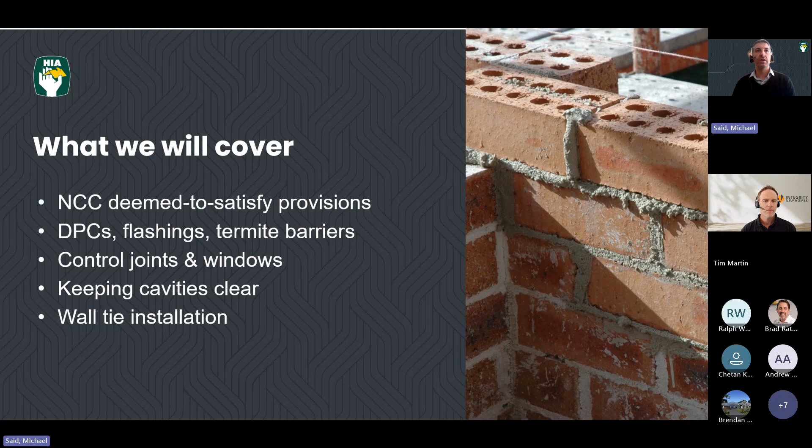I'm just going to briefly cover off the NCC deemed-to-satisfy provisions. I'll look at DPCs, flashings, termite barriers, control joints and windows, the need to keep cavities clear, as well as wall tie installation.

Starting with the NCC compliance structure and how it works: for houses there are 3 different deemed-to-satisfy options, set out in provision H1D5 of NCC 2022 Volume 2. So if you're doing brickwork or masonry, you have 3 different separate compliance pathways, all equivalent in terms of compliance, all deemed to satisfy. There's also the option of a performance solution, but in terms of deemed-to-satisfy, these are 3 separate and different compliance pathways - you can't mix and match between them unless you do a performance solution. So if you choose one, you need to stick and comply with that one in its entirety.

The first option is the use of Australian Standard 3700. The 2018 edition is referenced in the 2022 NCC, and it's also referenced in Volume 1 for multi-residential and commercial buildings - it's the only reference in Volume 1. The second option is the AS4773 series, basically masonry for small buildings. There are 2 parts: Part 1 is a design standard, Part 2 is a construction standard. This is only referenced in Volume 2, more for housing, designed more like a recipe-style standard as opposed to an engineering standard like AS3700, and it's probably more common for housing construction.

The final option is complying with Part 5 of the ABCB Housing Provisions Standard. Again, it's an equivalent option, but it does have some limitations: it's only up to a certain wind speed, only on a Class A and M site, not in alpine areas, not on buildings requiring earthquake design, and does not cover reinforced masonry.

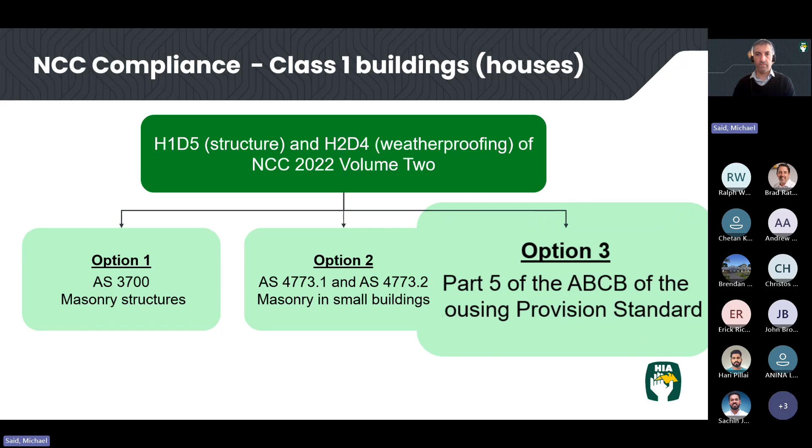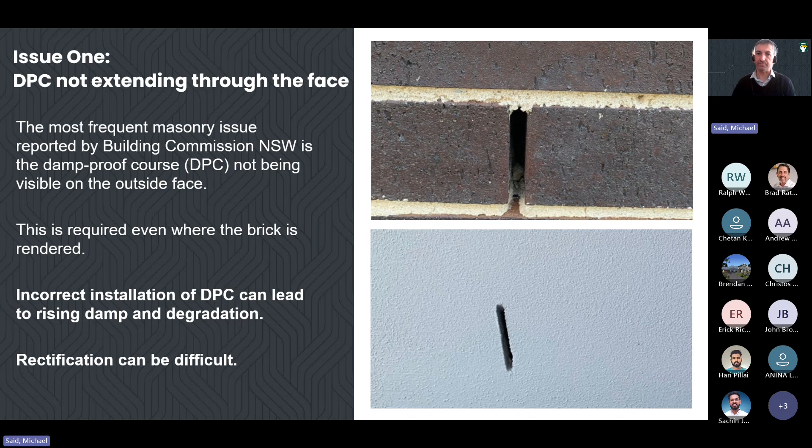Other things to consider is the proper material selection for your DPC. Materials complying with AS 2904, so polyethylene sheets and bitumen, or PE coated aluminium sheets, are typical DPC materials. The standard also includes other options like bitumen impregnated fabrics.

Also you need to consider your laps at your corners and at your junctions of 150 millimeters, and obviously the full width at the corners, and also making sure that your DPC has enough clearance to the ground level. Depending on what type of ground level you have, you're looking at between 50 millimeters and 150 millimeters of clearance. If you've got a paved area that's covered, you can reduce that clearance between the DPC and the finished surface level to around 50 millimeters, 75 if it's uncovered, or 150 for pretty much everything else.

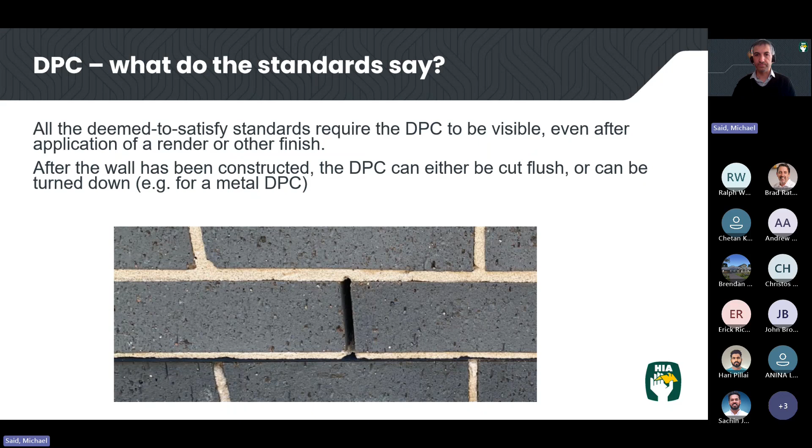So when we look at DPCs and flashings, there's obviously a DPC, but there's also a flashing, and the flashing isn't always acting as the DPC, but where it is, it needs to be visible from the face. Where the flashing is separate to the DPC, it depends on which standard is being used and where the flashing is located. For example, a window flashing or a head flashing is not necessarily acting as a DPC, so the requirement there is not necessary for it to come all the way to the outside.

If we're looking at the housing provision standard, if it's acting as a cavity flashing, or at the base of the wall or something like that, then it needs to come out through to the face. If it's a roof abutment, again it needs to come all the way through the face. But if it's a sill or head flashing, it only needs to come in around 30 millimeters into the face, so it doesn't need to come all the way through the wall. For AS 4773, cavity, sill and head flashings similarly don't need to come all the way through the wall, but if you've got a roof abutment flashing, then it does. And for 3700, if you're using that standard, then you're looking at following the engineer's design, because AS 3700 is an engineering design standard.

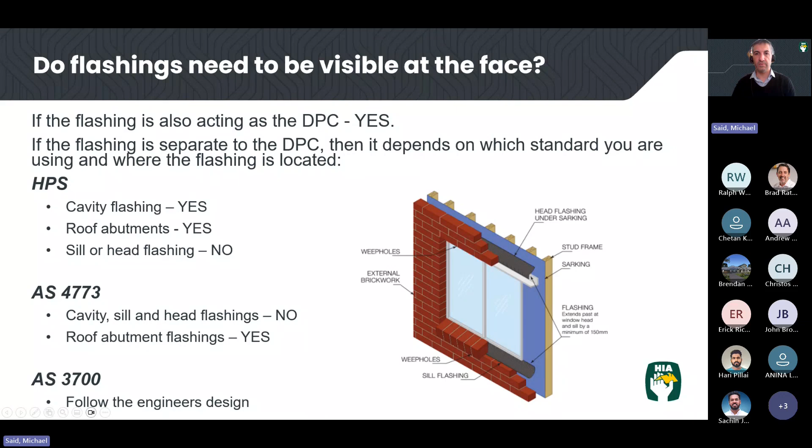So what about your termite barrier? If you've got a termite barrier that's part of your DPC as well, or just above your DPC, you can have the DPC integrated termite barrier. I think there are a few on the market.

If you've got a termite barrier as a perimeter cavity, like a blanket or a chemical sheet as the perimeter barrier, it too also needs to come through and be visible from the outside. It's something to be mindful of. You can't have it sit 10 mil in because it's not going to provide you that continuous treatment. There is also a requirement of AS 3660 Part 1, which requires the edge of any sheet-based termite barrier to be exposed even through the render. So if you're using a sheet or a chemical impregnated sheet as your termite barrier, it needs to come through and be visible on the face of the wall, similar to your DPC.

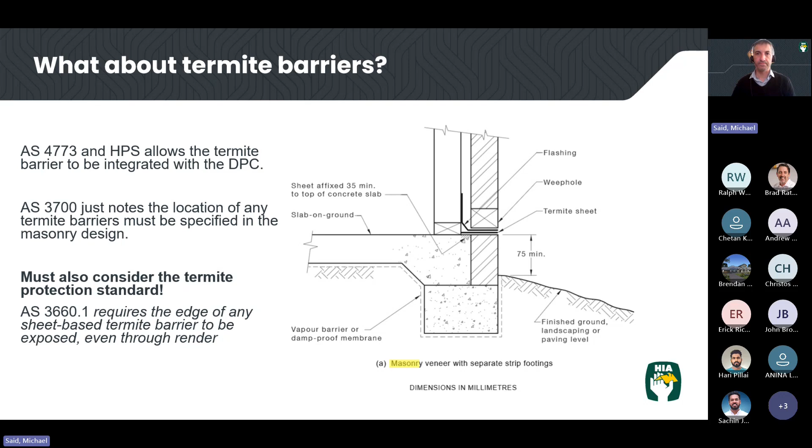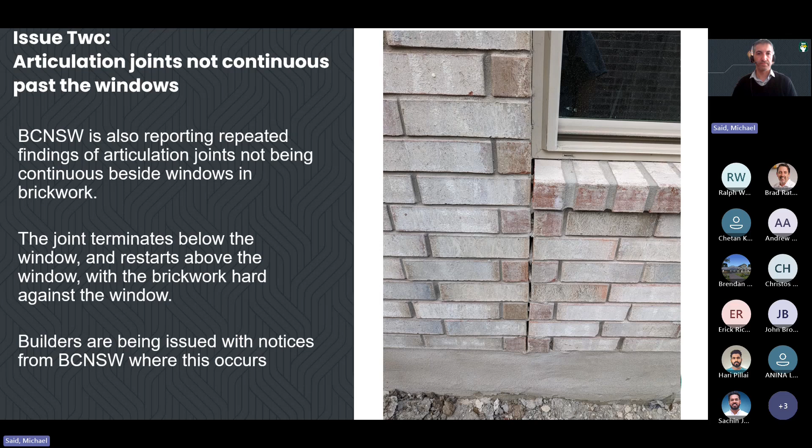In terms of what the standards say, it basically depends on which standard you're using as to what is required in this sort of circumstance. In our opinion, because the housing provision standard only specifically mentions joints between masonry elements, and a window is not a masonry element, the requirement for a 10mm width joint does not apply next to the window under that standard. However, other standards would imply a joint must be continuous for the full height of the wall, including beside all windows or doors.

If you look at AS4773, it's quite specific and says a control joint placed at an opening - and a control joint includes an articulation joint and an expansion joint - it shall provide clearance to the door and window frame to accommodate any movement and remain weatherproof. Similarly, AS3700 talks about the joints extending the full height of the masonry.

Obviously, if you're doing a Class A site, then articulation joints aren't required because you don't have the excessive slab movement. So due to the differences in approach and wording across the standards, there is still quite a bit of confusion in the industry about what the requirements are for control joints and whether they need to be continuous or not at the windows, and also how to actually do it correctly, particularly if your windows are designed generally to the brick opening sizes. So it needs quite a bit of adjustment in terms of your brick width or how you allow for your brickwork to provide for that 10mm clearance.

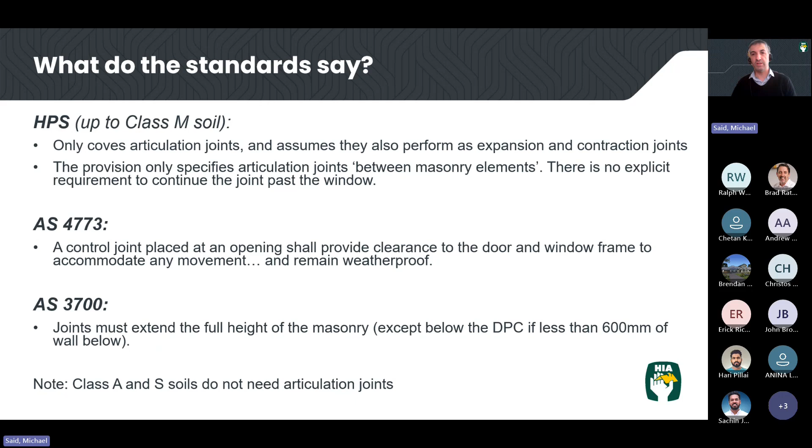So there's probably a way where you can avoid the confusion altogether. Often we do place control joints beside windows and openings because it may give a better appearance or helps to hide it. However, you don't need to do it next to a window - it's not a requirement that it has to be next to a window. Obviously it's a certain distance from the window, but doesn't have to necessarily be at the window itself. So the control joints can be located at other locations in the wall, and with careful planning, there is potential to conceal many of these behind or next to other features such as downpipes. So something to think about, to avoid all those other issues, is maybe not necessarily putting your articulation or control joints exactly at your window.

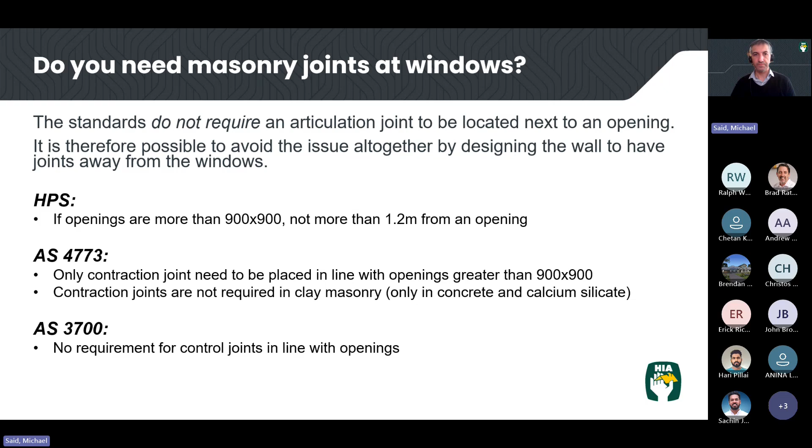So we can see in the diagram here from the NCC, we've got six articulation joints, and you can see where they're located by those little figures. None of them are actually directly at the window - they're all within 1.2 of the window, but not directly at the window. So something to think about, to avoid that confusion and the risk of having an issue, is maybe place your articulation joint close to your window, but not necessarily at the window itself. But obviously, if you do want to put it at the window, it might be wise to think about allowing that 10mm expansion at the window all the way through, and then adjusting your brickwork to suit.

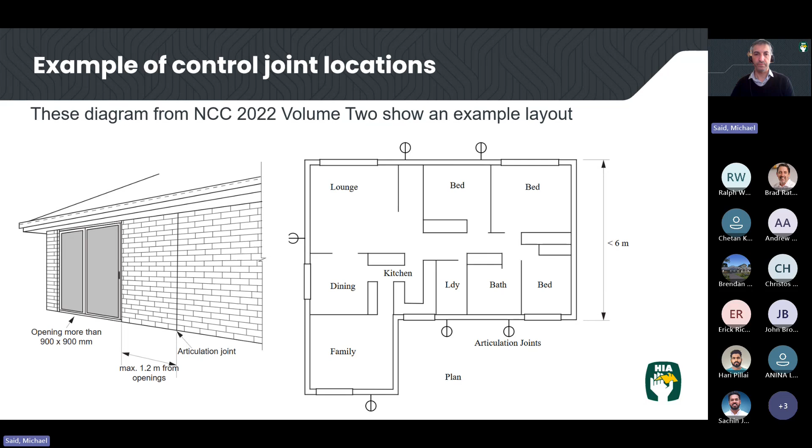There is one issue though - if you do move your control joints away from the window, that resolves the masonry detailing problem, but there is another provision to be mindful of, and that's in the window installation standard, such as AS2047 or Part 8.2 of the housing provision standard. AS2047 requires sufficient space around the window to accommodate thermal and structural movement, and any gap is to be sealed with suitable flexible mouldings or flexible caulking to resist water penetration or other weatherproofing methods. Part 8.2 requires a 10mm gap between the top of the window and any load-bearing framing or masonry. It has no requirement for the sides of windows, but recommends isolating bare aluminium from contact with masonry. Probably, again, also check with your window supplier for installation details.

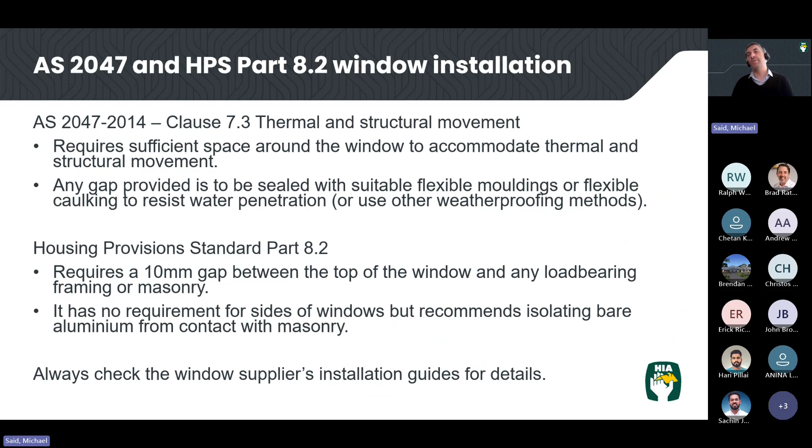But there is, when it talks about the gap around the window, it doesn't prescribe a distance - it just says you need a gap. So again, something to be mindful of, that there is a requirement around the thermal expansion requirements, but again, probably something to have a chat to your window supplier about.

The next issue is about making sure you keep your cavity clear. We have cavity masonry and masonry veneer, and the cavity is there as a weatherproofing requirement. If we've got mud, other debris, or whatever in that cavity, it's going to create issues with water ingress or not allow that cavity to drain correctly as designed. It's quite common to have mortar droppings, building debris, waste, or even pipe work in the cavity, which impacts drainage and prevents that cavity from draining down to the base of the wall.

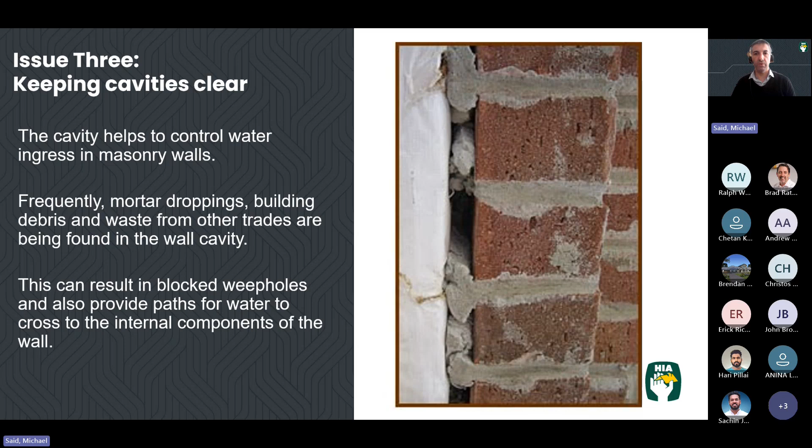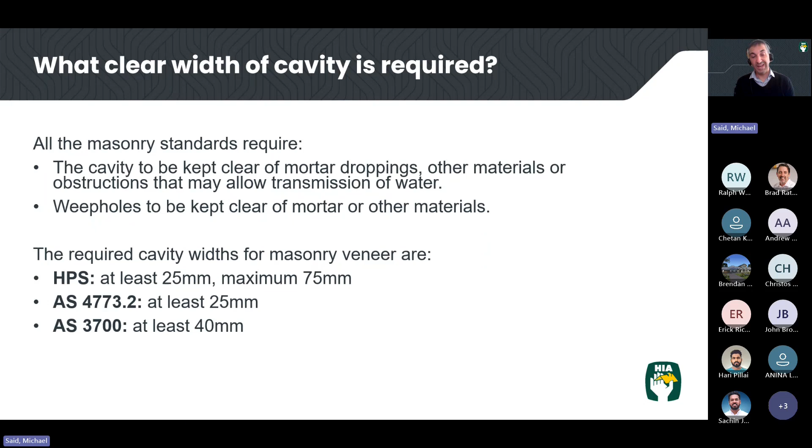All the masonry standards require the cavity to be kept clear of mortar droppings, other materials, or obstructions that may allow the transmission of water. Weep holes also need to be kept clear of mortar or other materials. There are minimum cavity widths for the Housing Provision Standard, between 25mm and a maximum of 75mm. For AS4773 Part 2, it's at least a 25mm cavity, or if you're using AS3700, you're looking at a minimum cavity width of 40 millimeters.

Your cavity also needs to be clear of any pipe work. You can still run pipe work in a cavity - there's nothing preventing that, but in running that pipe work through the cavity, you need to maintain your width. So if you require a 25mm cavity width, that width needs to be measured to any pipe work, not just to the wall frame itself. You need to ensure your services are installed against the frame. If those services are crossing the cavity, like wall penetration for taps, they should be sloped to drain to the outside.

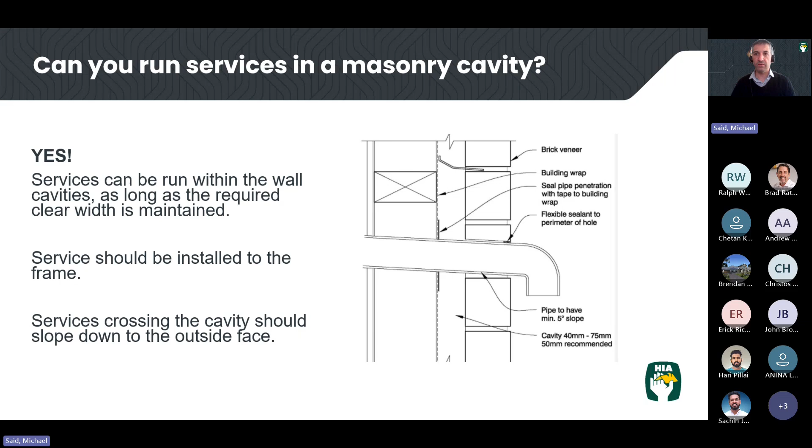The final group of issues I'm going to talk about are around wall ties. There's a couple of different things we can look at here: durability or incorrect durability, incorrect strength or spacing, some damage to the building membranes, and how you install it in terms of slope. If you slope that wall tie downwards towards the frame, any water is going to drain back towards the frame, which is not a good idea. You want to make sure your wall ties are turned upwards and sloping in a direction towards the masonry itself.

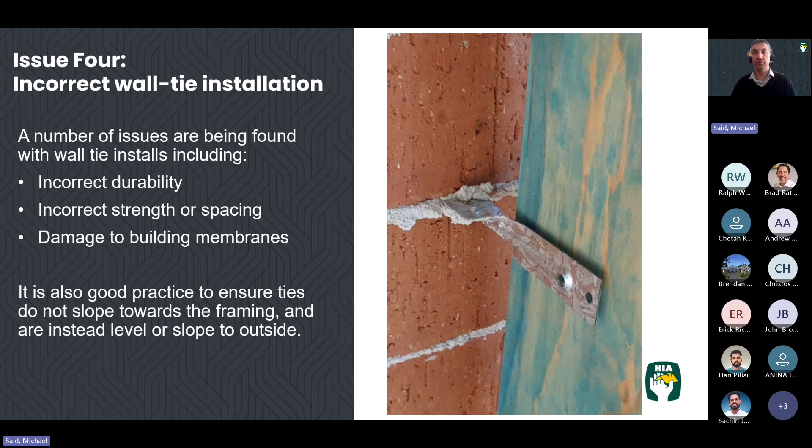Regardless of which masonry compliance pathway you use, your wall ties must comply with AS/NZS 2699 Part 1.

For durability, it depends on your distance from the coast and whether that coast has breaking surf or not. For the Housing Provisions Standard under 5.6.5d: if you're less than 1 kilometre from breaking surf, or less than 100 metres from non-surf salt water, or in heavy industrial environments, you need 316L stainless steel or engineered polymer. For 1K to 10K from the surf or 100 metres to 1K from non-surf, you're looking at galvanized steel or stainless steel, and everywhere else a minimum of 300 grams per square metre galvanized steel.

If we go to AS4773 Part 1 Section 4, we're looking at R3 ties for 100 metres to 1K from a non-surf coast, or 1 kilometre from a surf coast. Severe marine, closer to the coast, is R4, and where you're 200 metres from breaking surf, you're looking at an R5, which is a specialty type product.

If you're looking at AS3700, it's going to be based on engineer's design, so you need to follow your engineer's instructions. AS4773 and AS3700 are similar in terms of wall ties, but there are some additional exposure environments in AS3700.

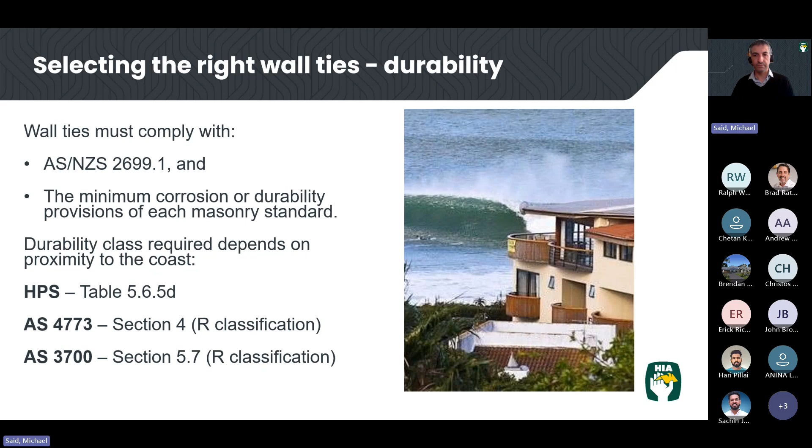Type B ties are not typically specified in Australia, but are standard in New Zealand. So just make sure you're selecting the right wall ties in terms of strength and spacings.

In terms of HPS, the requirement, if you're looking at an N speed up to N2, we're looking at a light duty tie. More than N2, then you're up to a medium duty tie, and we're looking at 450 studs, 600 mil vertical spacing, or if you've got 600 mil stud spacings, then that vertical spacing comes down to 400 millimeters. AS 4773, we're not more than a 600 mil vertical spacing.

Again, the wind zone and horizontal spacing will then determine what type of duty classification. So again, depending on which standard you use, it's going to have different requirements for that and how you determine it. So again, why you need to be mindful and upfront, so it's clear everyone in your process knows which standard you're using as your compliance pathway.

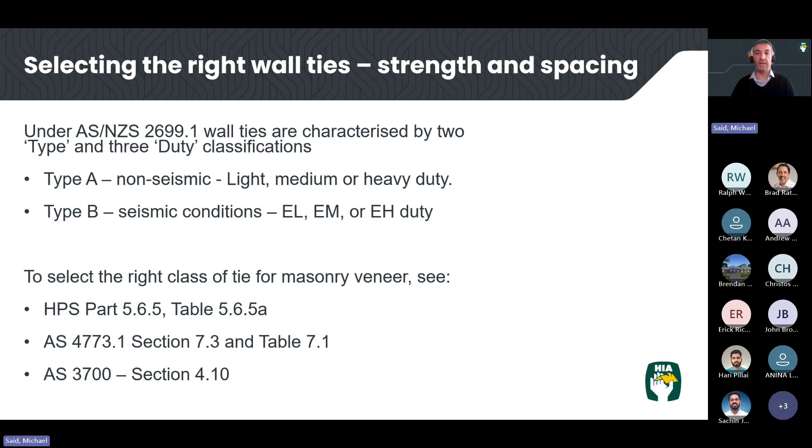3700, we're talking generally 600 in each direction, but again, it's going to come down to your engineer's design if you're using 3700 for your brickwork.

As an example, under 4773, if you've got an N3 wind zone, we've got 2.7 metre and 3 metre high walls with a 600 stud spacing, we need a medium duty tie. If we go down to a 2.4 metre wall with a 450 mil stud spacing, we can go down to a light duty tie, even though we're in the same wind zone. Going up to an N4 zone, all walls require medium duty, and at N5, looking at heavy duty at 600 mil studs.

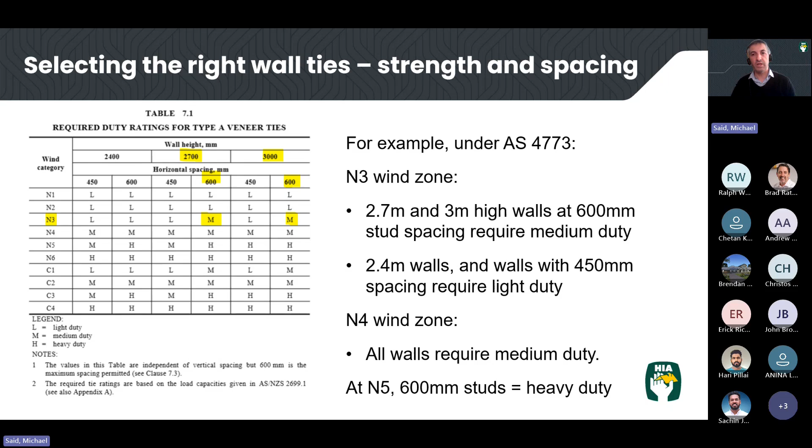Just a couple of things on pliable building membranes. If you do have a pliable membrane external wall, obviously you can't have holes and tears in that membrane. They must be taped and sealed. Leaving a hole or tear will compromise the membrane performance, and under wind load, the hole or tear may get larger. If the membrane flaps across the cavity, it also provides a path of moisture to get into the wall, creating an issue with weather tightness.

HIA has become aware of this issue becoming a problem, especially where a medium duty wall tie is required in steel framing. So generally speaking, there's issues around those wall ties. Using a medium duty wall tie, because generally they're not face fixed, they're side fixed, and there's issues with the steel framing not being able to cope with

the performance and the requirements. So because the steel frame is not strong enough, it is something that the standards committee is aware of and is looking at. So if you do have steel framing and you do need medium duty ties, it is something to consider.

The main reason is that there are no face fixed ties on the market for medium duty on steel framing, only the side fixed. So it's something to be mindful of. If you do have steel framing and are using side fixed ties, you're not going to be able to get a fixing mechanism, because the fixing has to come with it that fits with that steel framing. So it is something to be mindful of.

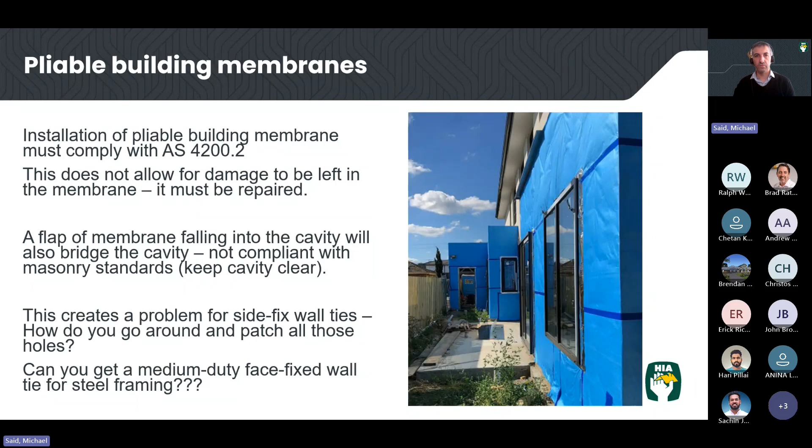Those sort of issues then become, well, do you actually need a building membrane in the first place? If we're talking water and condensation management, if you have a cavity behind the water control layer, so your brickwork, or even arguably a lightweight wall, if there is a cavity, then technically speaking, you don't need to have that pliable membrane behind it.

So the water control layer is defined as external cladding. Where a membrane is not installed for masonry, the water control layer would be the external leaf. So as a building membrane is not required in the housing provision standard condensation provisions and not specified in the masonry standards, a building membrane is not required in brick veneer construction or cavity brick construction either. You may be using it for things like energy efficiency or other sort of things, but it's not required from a masonry or condensation management perspective.

So when deciding whether or not you want to delete the wall membrane from your plans, like I said, just consider the other sort of things like energy efficiency or even bushfire as well. Although AS3959 doesn't require wall sarking for masonry veneer, there are buildings combining a mix of masonry and cladding where sarking is required. But for steel frame, you can also use the NASH bushfire standard as a DTS, which doesn't require sarking for clad walls.

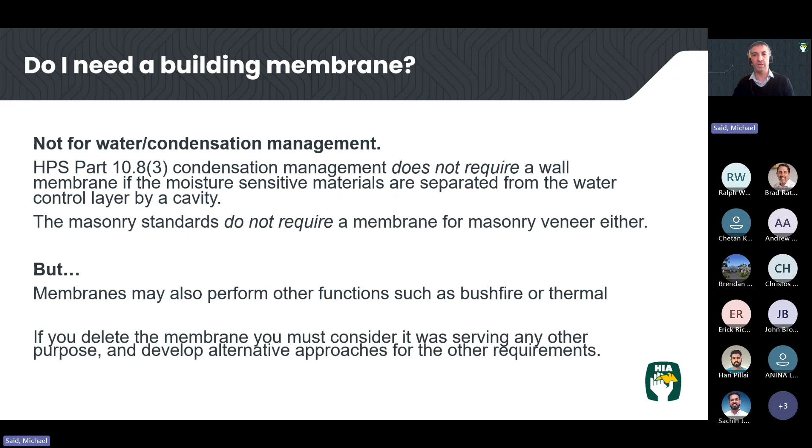And again, obviously, the R values from an energy perspective: do you need that sarking or building membrane there to achieve your energy efficiency requirement, or is there another way of achieving that? So that's a very quick rundown of some of the issues from brickwork. I know I've gone a little bit over, but if anyone has any questions on what I've discussed, I'm happy to try and answer them.

No, that's perfect timing there, Michael. We haven't had anyone raise their hand for a question yet, but please do if someone has a question. Got Brendan here. I'll just allow your mic there, Brendan. You should be good to go. Brendan, you might be on mute. Allowed your mic there, Brendan. You just have to unmute yourself from your end as well.

Can you hear me? Yep. Yeah, have you got any pictures of the expansion joint against the window? Because I can't see how it works without being pretty bloody ugly. Yeah, so basically you wouldn't run the actual joint itself up there. Generally, the way you would do it is you would cover it with a storm mould. You'd have your window and your gap beside the window, and then an aluminium angle or something similar to the window material, but you'd fix it to the brickwork, not to the window, to allow that movement across the window.